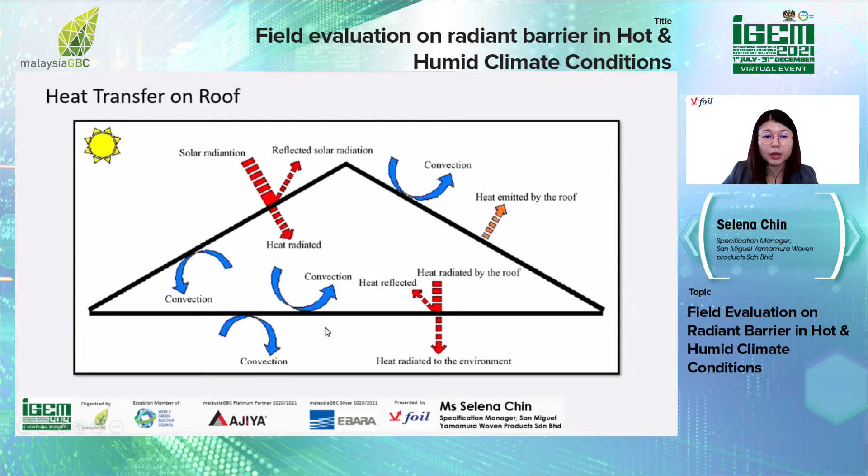The major contributor to heat gain is actually the sun. The sun will heat up the roof, then transfer the heat into the building through conduction, convection, and radiation.

According to research done by Nahar in 2003, 50% of the thermal building loads in hot climates come through the roof. And according to research done by Richards in 1977, the proportion of heat transfer flowing down from the roof through the ceiling is 87% from radiation, 13% from conduction and convection combined, whereas heat transfer through walls is 70% from radiation, 25% from convection, and 5% from conduction.

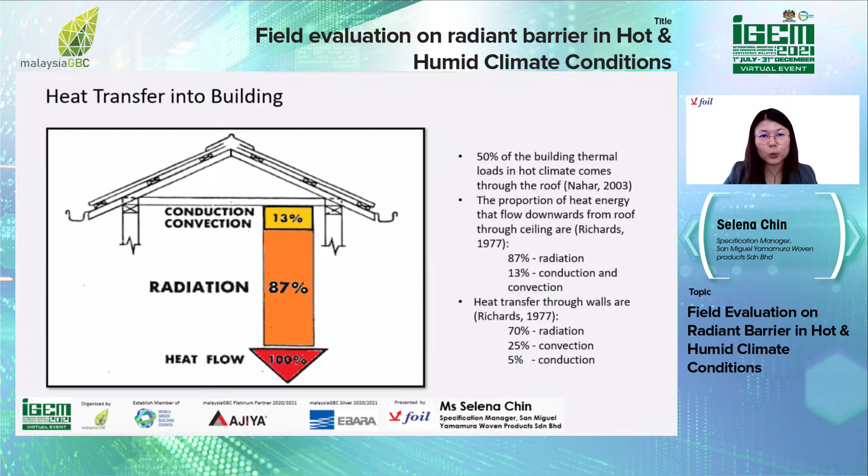Now we understand that 50% of the thermal load is actually coming from the roof. Is it really helpful when we insulate the roof with radiant barrier?

Let's find out. These are the types of thermal insulation technology used for building energy efficiency. It is divided into 4 types of technology: bulk technology, reflective technology, nanotechnology, and vacuum technology.

Bulk technology includes fiberglass, mineral wool, expanded polystyrene, and extruded polystyrene. Radiant barrier, reflective insulation, interior radiation control coating, and gas fill panels are examples of reflective technology. For nanotechnology, one example is aerogel, and vacuum technology includes vacuum insulation panels. Today, we will focus only on radiant barrier and reflective insulation.

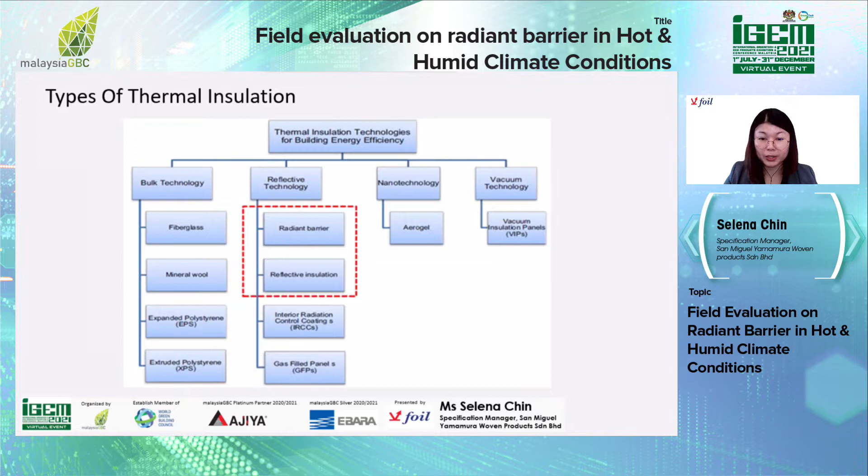What is radiant barrier? Radiant barrier consists of a highly reflective material, usually aluminum foil, laminated to a substrate. The substrate can be woven fabric, bubble fabric, paper fabric, film, or etc. Aluminum foil can reflect 95% of the heat.

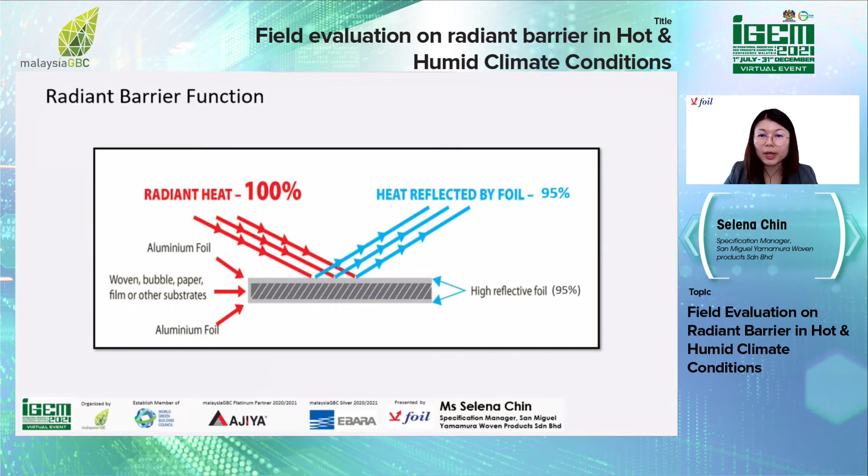How do you express the thermal performance? The thermal performance is expressed in thermal resistance in SI unit. SI unit is an international system of unit and is denoted as RSI.

What are the factors that affect this RSI? First is the emissivity of all surfaces facing the enclosed airspace. Second is the airspace dimension in the direction of heat flow. Third is the heat flow direction, whether it's up or down. And fourth is temperature difference across the airspace, or we call it boundary temperatures.

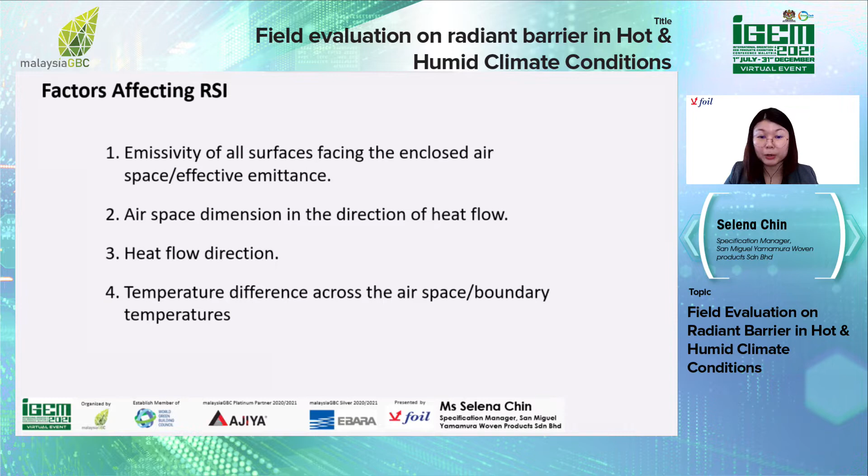There are 3 types of testing methods to measure the thermal resistance of radiant barrier and reflective insulation in the assembly: laboratory testing, calculation method, and field tests. Let's explore each testing together.

Heat flow meter is one of the examples of lab tests. It's tested according to ISO 8301 or ASTM C518.

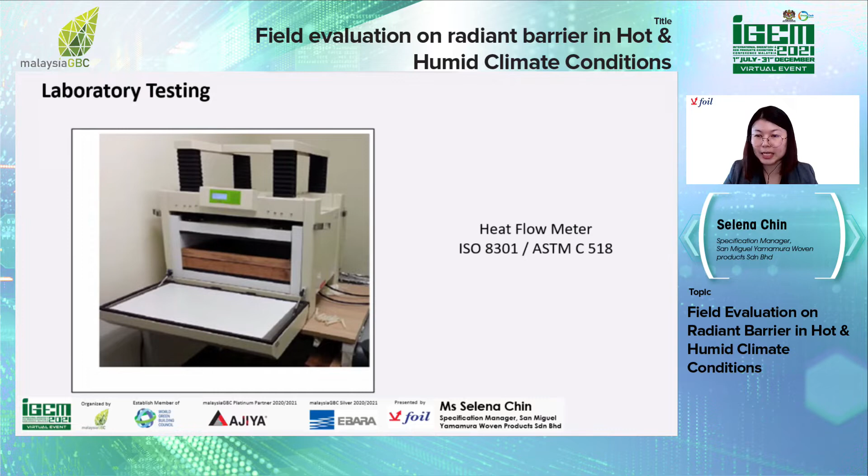What are the advantages of using this heat flow meter? First, it measures the steady state of one-dimensional heat flow through the sample. It can calculate the sample's thermal conductivity and resistivity.

This method is very sensitive. You can measure the thermal resistance of 0.1 meter square Kelvin per watt, and measure heat flow up or down with different angles. It's very easy to operate and can obtain the total RSI of the assembly.

The disadvantages are: specimen size is limited by the equipment chamber dimension, it's very sensitive to heat loss through the sample edges, and it must be calibrated using a known thermal resistance material.

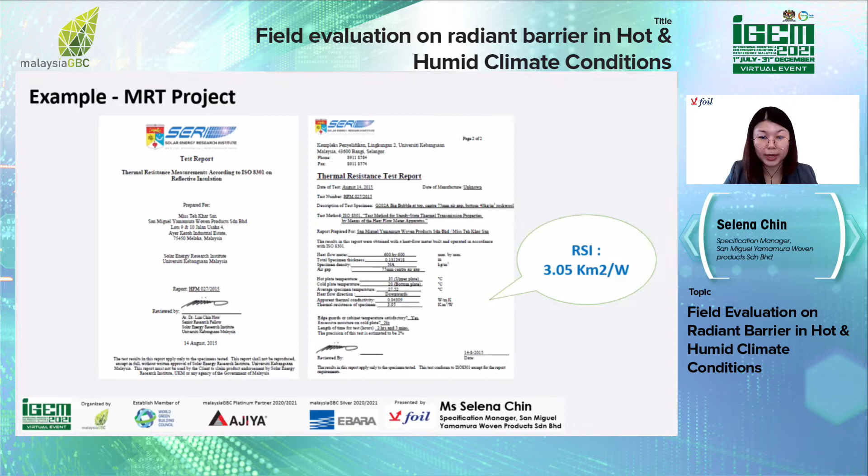Another example of lab test is guarded hot plate. It's tested according to ISO 8302 or ASTM C177.

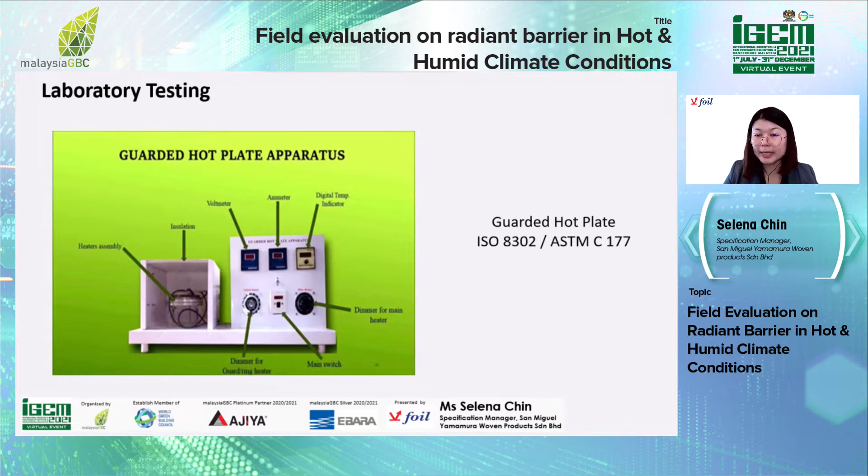The good points of using guarded hot plate are: it measures steady state heat transfer through flat surfaces only, it's an absolute method because you need to measure the specimen dimensions, temperature, and electrical power on it, and it can operate over a wide range of temperatures.

The negative points are: it's just for flat specimens only, with limited specimen size. There must be good contact between the specimen and the hot plate because some samples may have uneven surfaces. Temperature imbalance between the hot plate and the guarded housing must be controlled.

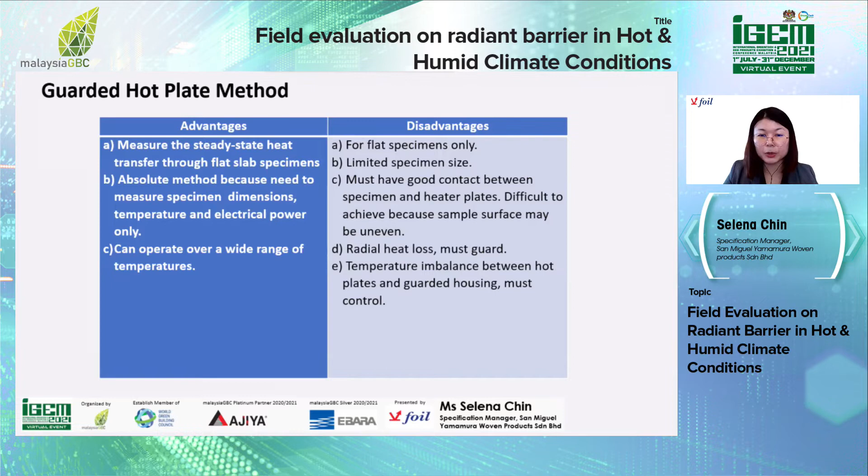The last example of lab test is guarded or calibrated hot box. It's tested according to ISO 8990 or ASTM C1363.

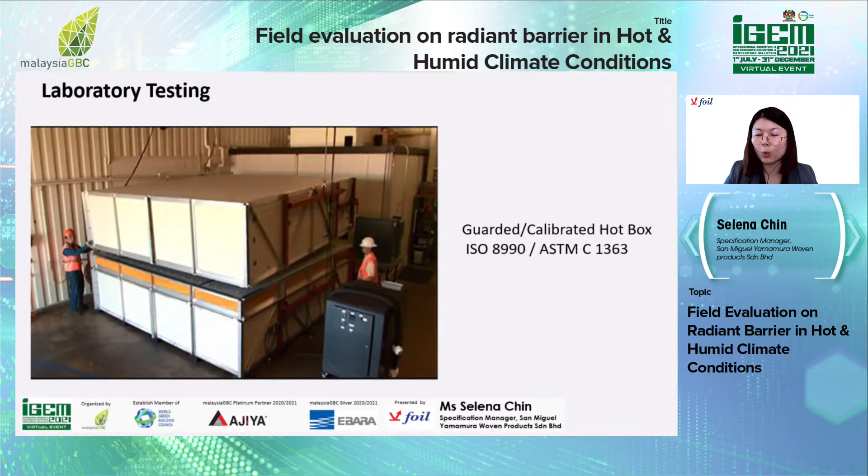The advantages of using guarded hot box are: it measures steady state heat transfer through a specimen, it is suitable for homogeneous and non-homogeneous samples, and it can be rotated to simulate the actual specimen orientation in the field.

The specimen size is definitely bigger compared to the previous two methods, and more thermocouples are used for better temperature measurement accuracy. It can also evaluate the U value for building assemblies.

The disadvantages for this method are: the result may be affected by air movement in the metering chamber, it takes longer time to reach steady state, the box must be sealed to prevent air infiltration, and it lacks precision because heat loss corrections are needed.

Second testing method is calculation method. It is according to ISO 6946, Australian and New Zealand Standard 4859.1, and ASTM STP 1116 standard.

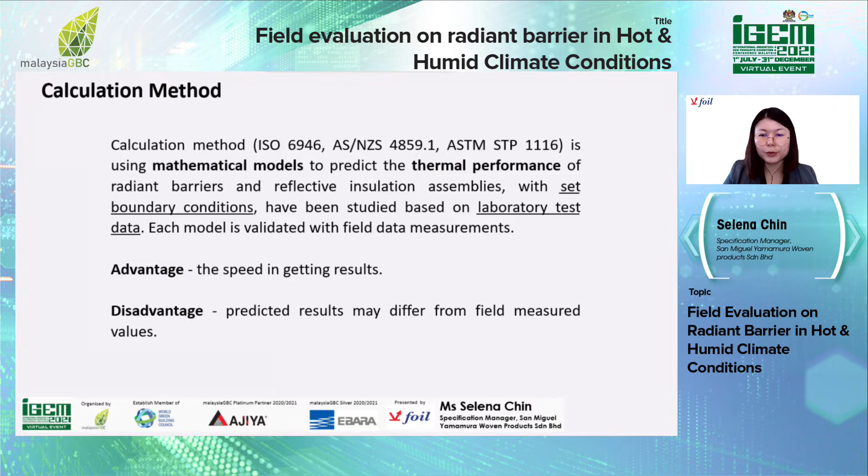It is a mathematical model to predict the thermal performance of radiant barrier and reflective insulation assemblies. You can get the result very fast, but the result may be different from field measurement evaluations.

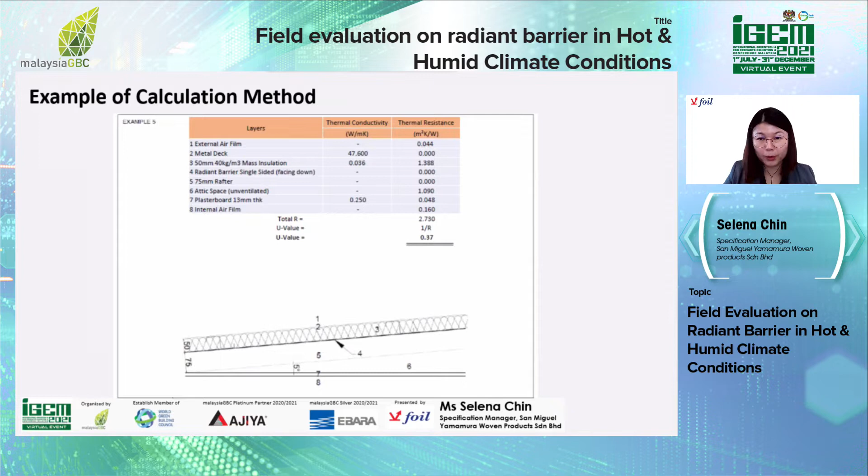This is an example of using the calculation method. You just plug in the numbers into the software, then you can get the total R value.

Field test is the method that is more complex, more time consuming, and requires more resources because the buildings are studied under actual weather conditions. It provides data that most accurately represents the conditions to which buildings are exposed, but there are many complications since under actual weather conditions, the climate variables are uncontrollable. Today, we'll focus on field tests.

These are the problems that triggered us to conduct this field test. There is a lack of field study on the performance of radiant barriers in hot and humid climates, and not much scientific data on the influence of commonly used roofing materials, like tile roof or metal roof, on the performance of radiant barriers. There are ongoing debates on the performance of radiant barrier, for example, people are debating on the efficacies of radiant barrier.

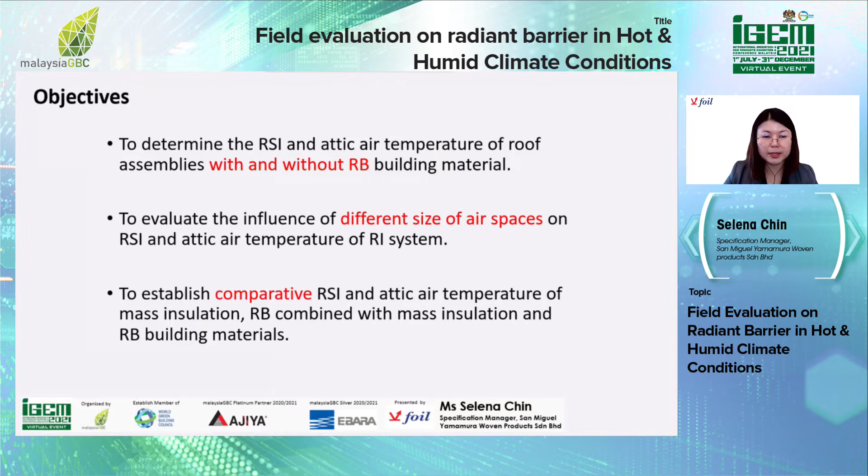The objective of the field test is to determine the RSI and attic temperature of roof assembly with and without radiant barrier building material, to evaluate the influence of different dimensions of airspace on RSI and attic temperature of reflective insulation system, and to compare the RSI and attic temperature of mass insulation, radiant barrier with mass insulation, and radiant barrier building material.

3 test cells were built in our factory located in Ayer Keroh, Malacca. Each test cell was equipped with 1 door. Dimension is 2.2 meter width with 2.5 meter length, and the height is 3.3 meter. The distance between these test cells is 1.9 meter. All of the test cells are facing west.

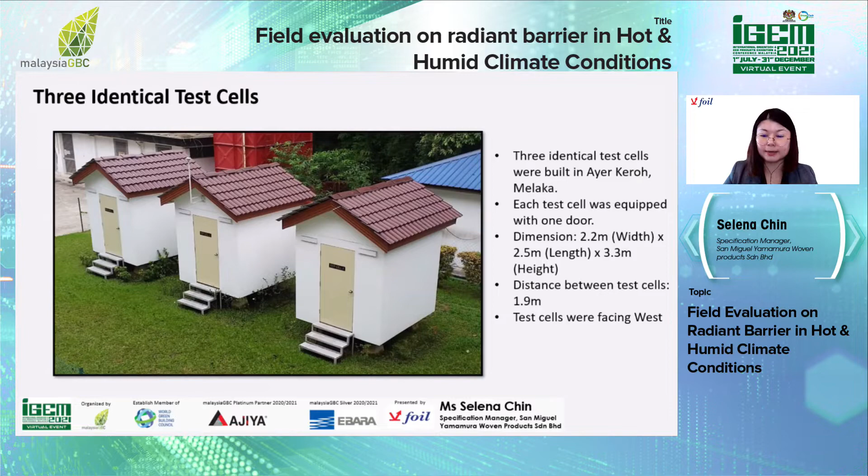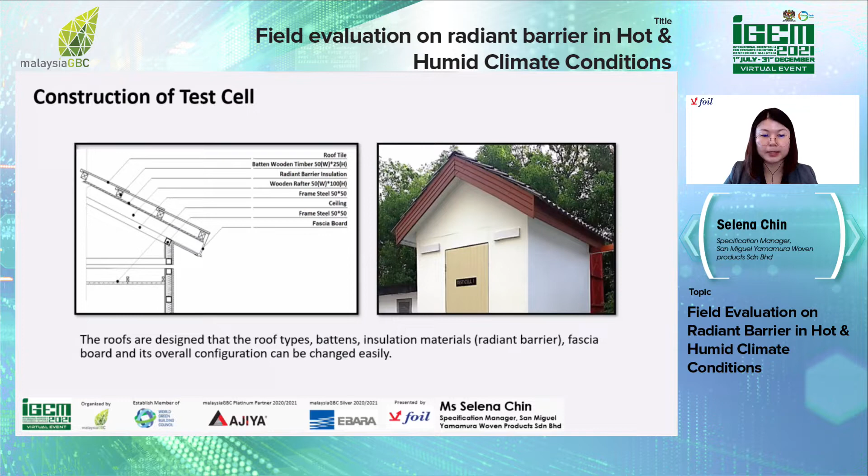The roofs are designed in such a way that the overall configurations can be changed easily because we will test the performance of different types of tile roof, different types of radiant barrier, and different dimensions of airspace. The wall and the floor are insulated with 100 mm thick wool with 80 kg per meter cube, to minimize heat gain and heat loss because we just want to measure the heat from top to bottom.

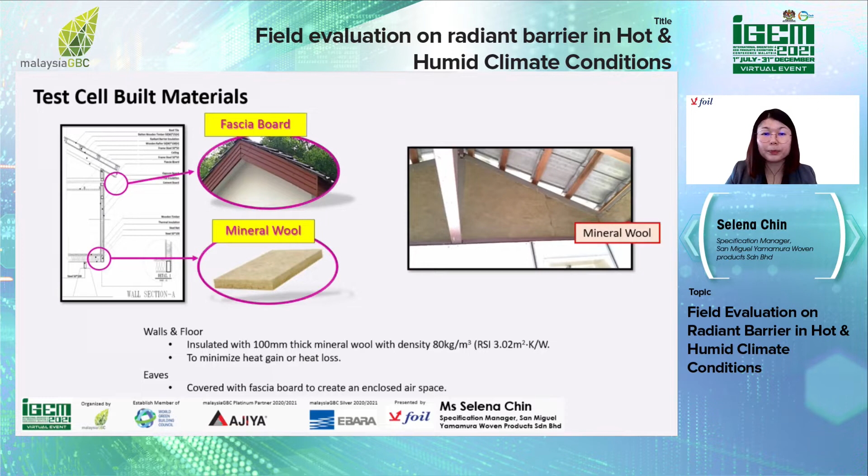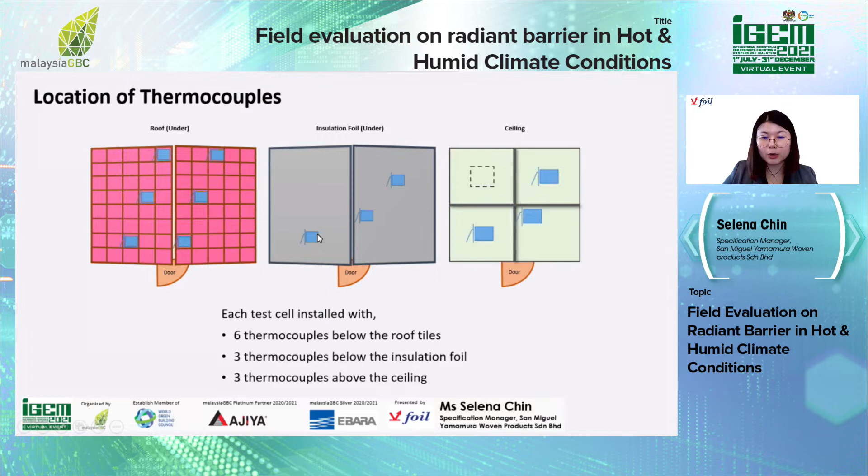This is where the thermocouples are located. We have 6 thermocouples below the roof tiles, 3 below the insulation foil, and 3 on top of the ceiling. This is the sectional view of thermocouple locations. Every thermocouple was installed using aluminium foil adhesive tape.

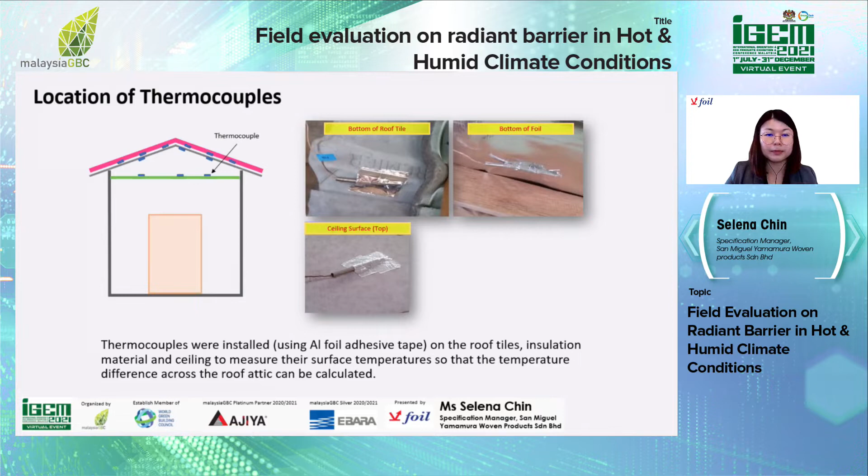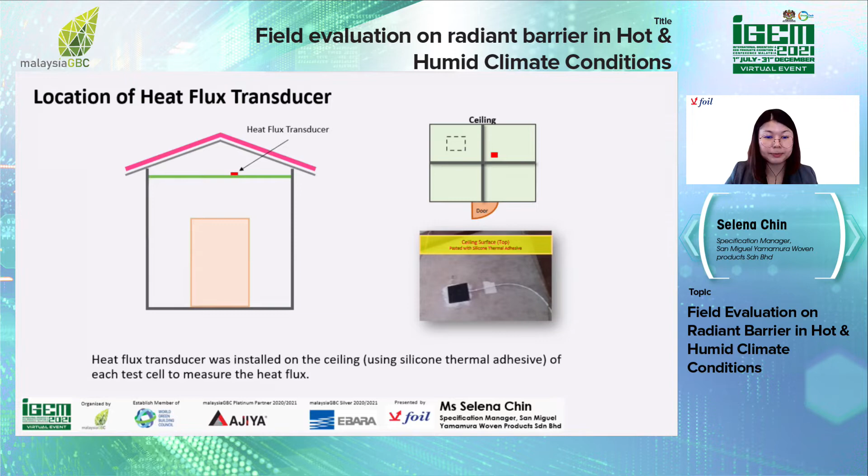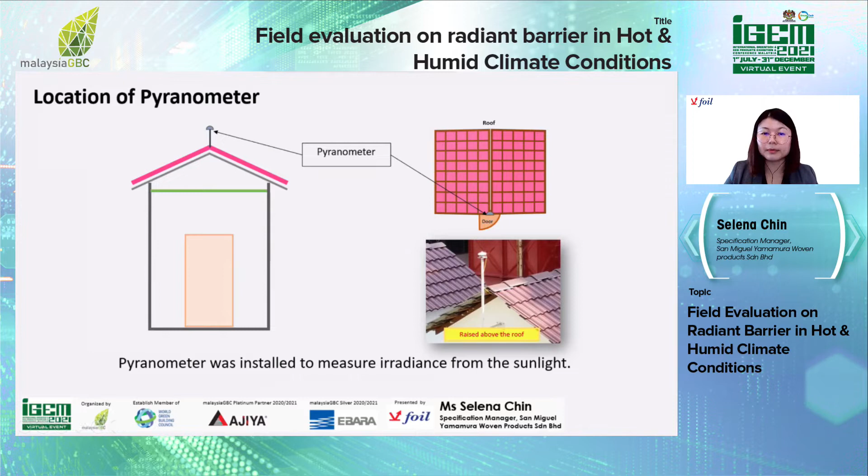This is the location of the heat flux transducer. It is installed on the ceiling with silicone thermal adhesive to measure the heat flux across the attic. The pyranometer was raised above the roof, installed to measure the irradiance from the sun. The data logger was installed in the attic to measure the attic ambient temperature.

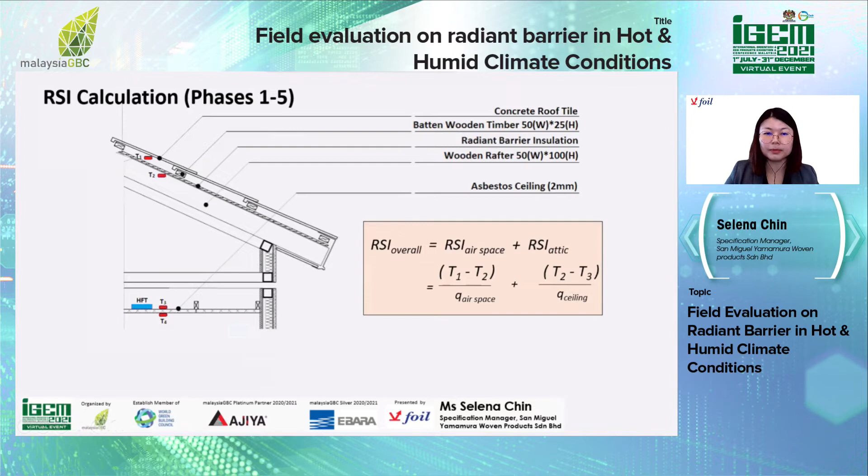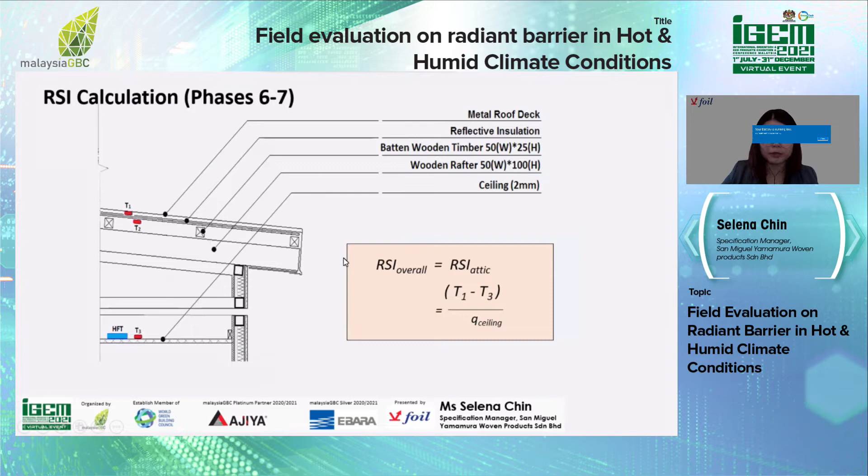This is the calculation for overall RSI. For phase number 1 to phase number 5, the overall RSI is the RSI of the attic plus the RSI of the airspace. This is the detailed dimensions of the airspace. The attic dimension remains unchanged, but we will change the airspace dimension according to the project tested. The overall RSI for phase number 6 and 7, which use a metal roof, is the total RSI of the attic because there is no airspace on top of the building. This is the dimensions for the metal roof.

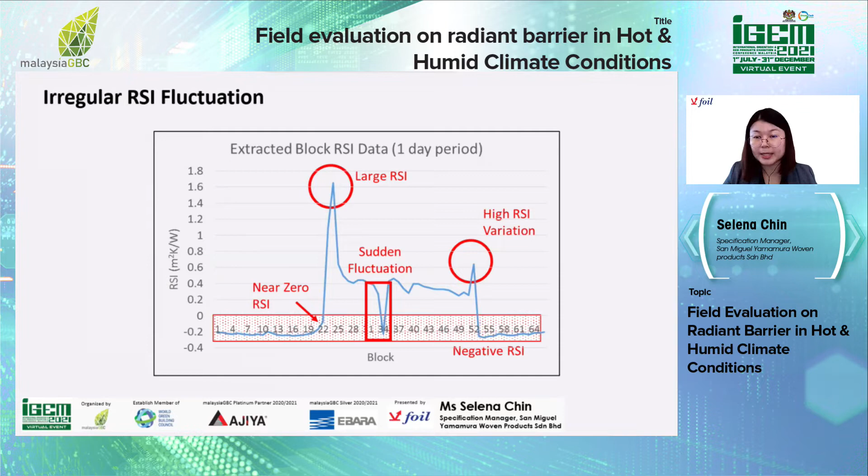Along the study, along the evaluations, we faced a lot of challenges, for example irregular RSI fluctuations. We get nearly 0 RSI, large RSI, sudden fluctuations in RSI, high RSI variations, or negative RSI. After a thorough study, we found out the possible causes for these irregular RSI fluctuations. Negative RSI can be caused by heat flow upward rather than downward. Large RSI can be due to the changing point between heat flow directions. Nearly 0 RSI is caused by small temperature difference, and sudden fluctuations are affected by cloud shadowing and raining. High variations can be caused by wind and cloud shadowing as well.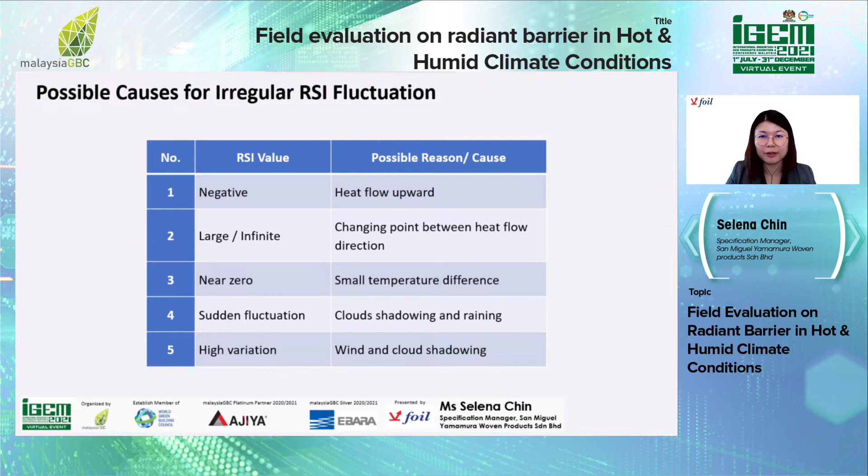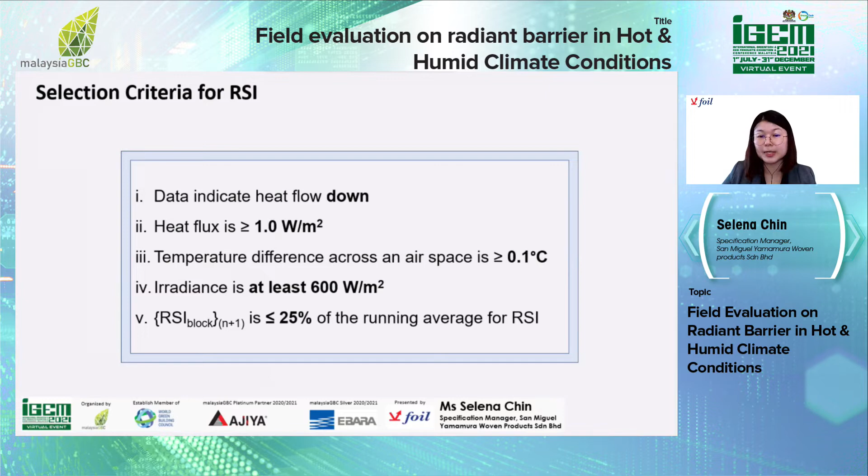Due to all these challenges and irregular RSI fluctuations, we have fixed some selection criteria for RSI. First, the data must indicate heat flow down. Second, heat flux must be more than or equal to 1 watt per meter square. Temperature difference across an airspace must be more than or equal to 0.1 degrees Celsius. Irradiance at least 600 watt per meter square. The average RSI block fluctuation must be less than or equal to 25% of the running average RSI.

Let's go phase by phase in detail. Phase 1 is tested under concrete tiles with 25 mm airspace. Test cell 1 uses woven foil, double-sided woven foil. Test cell 2 is without any foil. Test cell 3 uses double-sided aluminum foil. Let's see what the results are.

The objective for this phase is to determine the RSI for various types of radiant barrier with 25 mm air gap under one type of roof in hot and humid climates.

This is the result for phase 1 for attic ambient temperature. Maximum outdoor temperature is 43.3 degrees. Test cell 1 with double-sided aluminum foil achieved 37.2 degrees Celsius. Test cell 2 without any radiant barrier achieved 46.1 degrees Celsius. Test cell 3 with double-sided bubble foil achieved 36.7 degrees Celsius. Test cell 2 without any radiant barrier achieved the maximum, 46.1 degrees Celsius.

In terms of RSI comparison, the test cell without any radiant barrier achieved RSI 0.37. Test cell 1 with double-sided aluminium woven foil achieved RSI 2.37. Test cell 3 with double-sided aluminium bubble achieved RSI 2.93, which is the highest among the three.

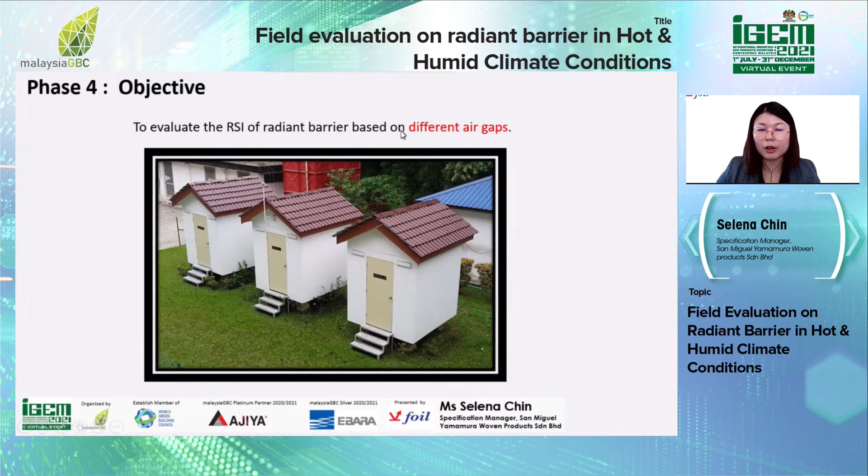Outdoor temperature is 36.9 degrees Celsius. The test cell with 50 mm airspace achieved 36.7 degrees Celsius. The attic with 25 mm airspace achieved 37.8 degrees Celsius. The attic with 75 mm airspace achieved 35.4 degrees Celsius, which has the lowest attic temperature.

In terms of RSI comparison, the RSI for 25 mm airspace is 2.41, and the RSI for 50 mm airspace is 2.41 as well. The RSI for 75 mm airspace again increased tremendously in this area, to 3.09.

Phase number 5: we changed the roof of two of the test cells to clay tiles with 25 mm airspace. Test cell 1 is installed with concrete tiles with double-sided aluminium foil. Test cell 2 is clay tiles without any foil. Test cell 3 is clay tiles with double-sided aluminium foil. The objective of this phase is to study the performance of clay tiles versus concrete tiles.

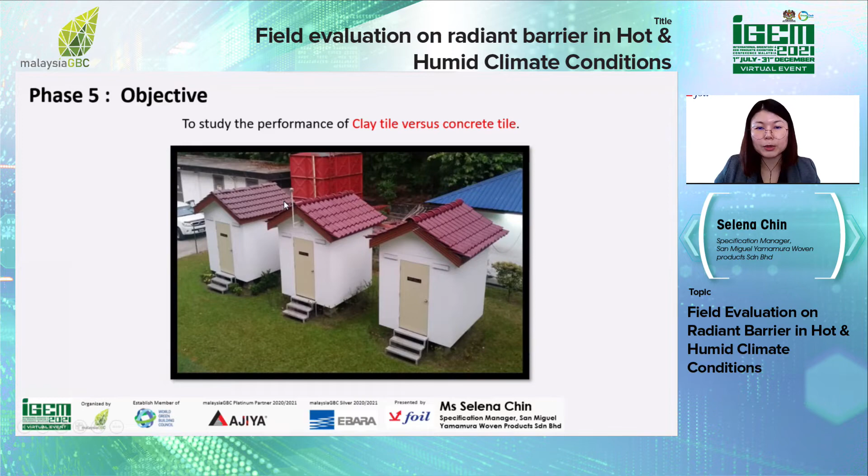You can see from the picture, test cell 1 remains with concrete tiles, while test cells 2 and 3 have had their roofs changed to clay tiles.

Outdoor temperature is 37.2 degrees Celsius. Test cell 1, concrete tiles with double-sided aluminium foil, achieved 36.7 degrees Celsius. Test cell 2, clay tiles without any radiant barrier, achieved the highest temperature at 43.8 degrees Celsius. Test cell 3, clay tiles with double-sided aluminium foil, achieved 36 degrees Celsius.

In terms of RSI comparison, RSI for clay tiles without any foil is 0.4. RSI for clay tiles with double-sided aluminium foil is 2.26, and for concrete tiles with double-sided aluminium foil it is 2.4. From here you can see clay tiles with radiant barrier perform slightly better compared to concrete tiles with radiant barrier.

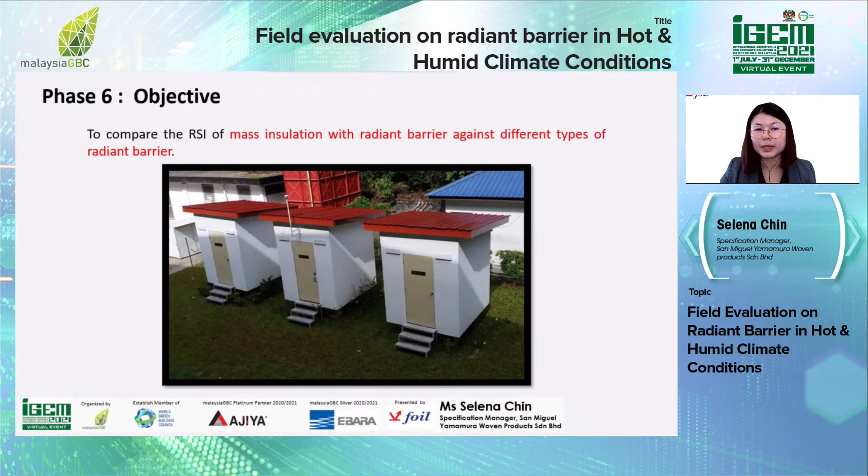Phase number 6, we have changed the roof to metal deck. For test cell 1, we are using mass insulations with woven foil. Test cell 2 uses 8mm double-sided aluminium foam foil, and test cell 3 uses double-sided aluminium bubble foil. The objective of this phase is to compare the RSI of mass insulation with radiant barrier against different types of radiant barrier. You can see we have changed the roof to metal roof.

In terms of RSI comparison, roof with double-sided aluminium bubble has the lowest RSI of 1.77, followed by roof with mass insulations with double-sided aluminium at RSI 2.23, and the highest is 2.37, using double-sided aluminium foam foil.

We have come to the last phase of the project. Using metal deck, for test cell 1, the insulations remain unchanged. For test cell 2, we use mass insulations only, and test cell 3 we are using bubble foil. Let's look at the results.

The objective for this phase is to study the RSI performance of different types of insulation system under metal roof.

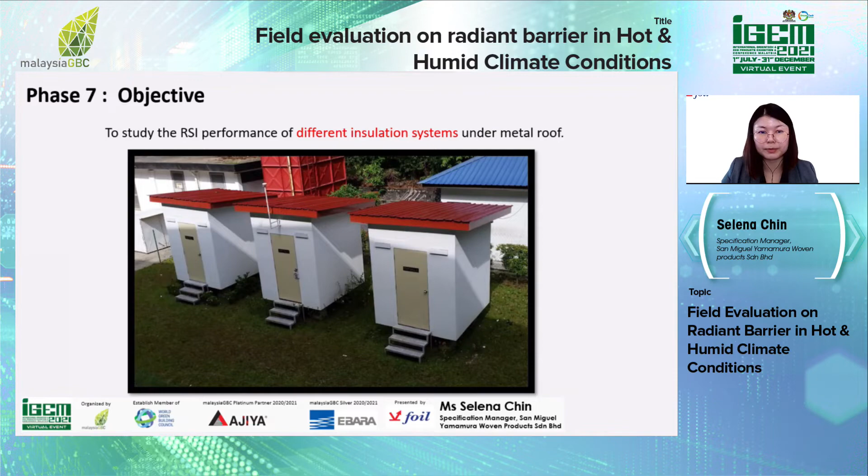This is the attic temperature result. Outdoor temperature is 37.7 degrees Celsius. Metal roof with mass insulations and aluminium foil achieved 37.6 degrees Celsius. Wool alone only is 39.1 degrees Celsius. And mesh with bubble foil itself is 38.1 degrees Celsius.

For RSI comparison, wool itself has the lowest RSI at 1.61, followed by bubble foil at 2.02, and the highest is wool plus radiant barrier at 2.77.

In conclusion, for concrete tiles with configuration of 25mm space, test cell 1 with woven foil has RSI 2.37, without foil is 0.37, and with bubble foil is 2.93. There is an improvement of 24% when you change from woven foil to bubble foil.

Test cell 2, concrete tiles, 50mm space: there is an increment of 25% in the RSI when you change from woven foil to bubble foil. And comparing concrete tiles with clay tiles, there is a 6.2% increase in the RSI when you change from concrete tiles to clay tiles.

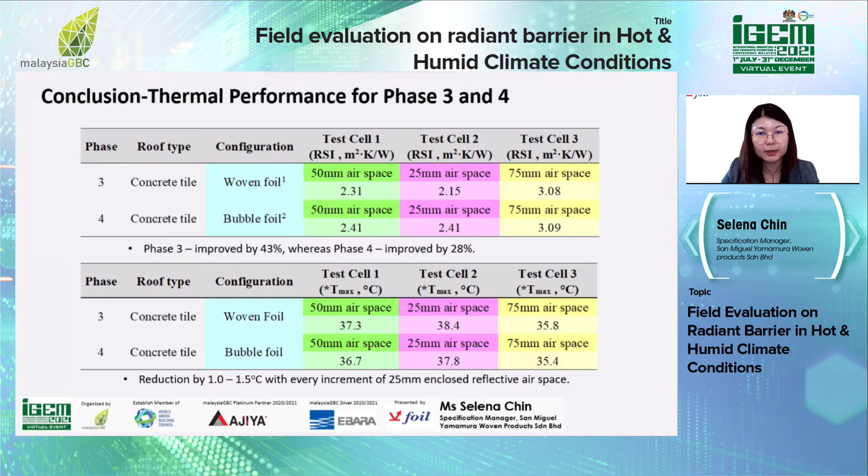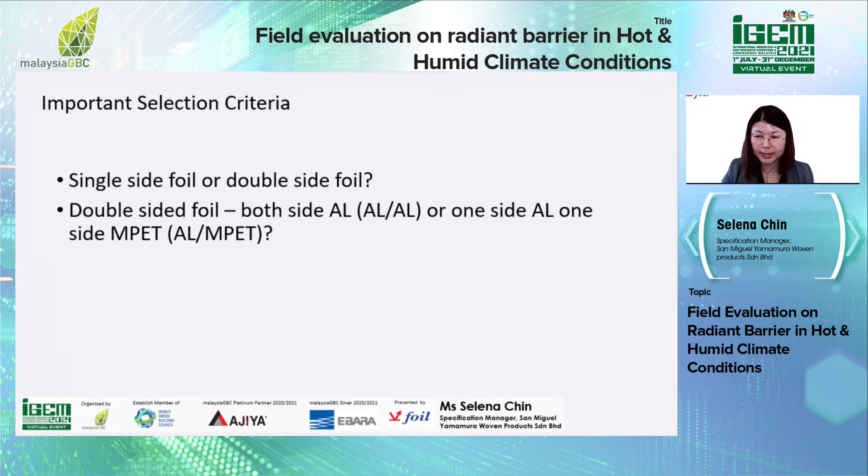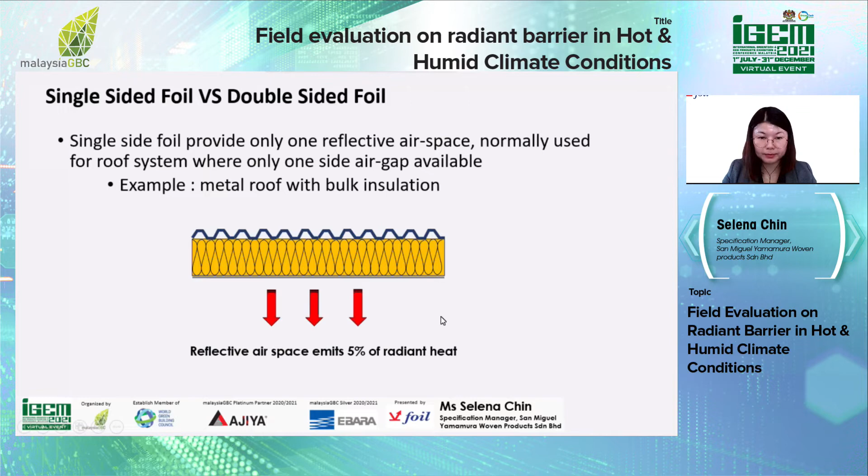Double-sided aluminium foil, with aluminium and metallized sides, functions the same as single-sided aluminium foil, but provides a better vapor barrier. Double-sided aluminium is suitable for tile roof systems. In a tile roof system, there are two types of air gap: one in the attic airspace, and another at the batten area. Using double-sided aluminium foil in a tile roof system can maximize the thermal performance.

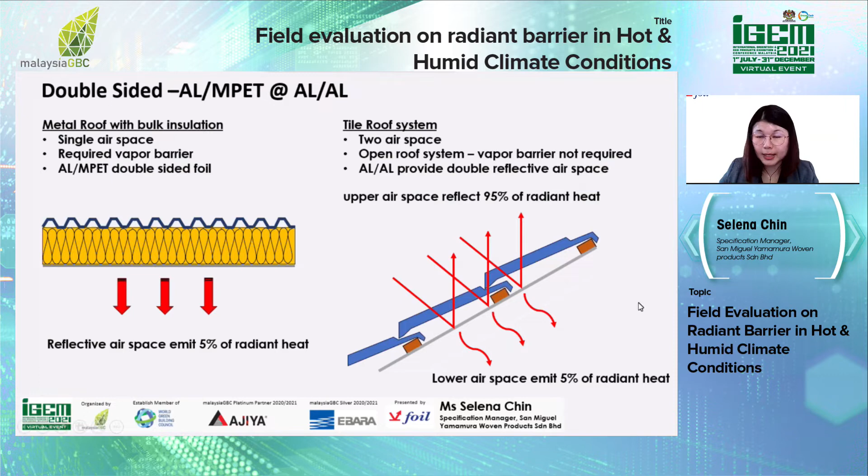Of course, a suitable material always comes together with proper installation. There are important guidelines to follow. First, ensure the high reflective surface is facing the air gap. Ensure no leaking on the roof, otherwise the aluminium will be oxidized. We encourage 3 to 6 inches overlapping at the edges, and avoid installation during raining days.

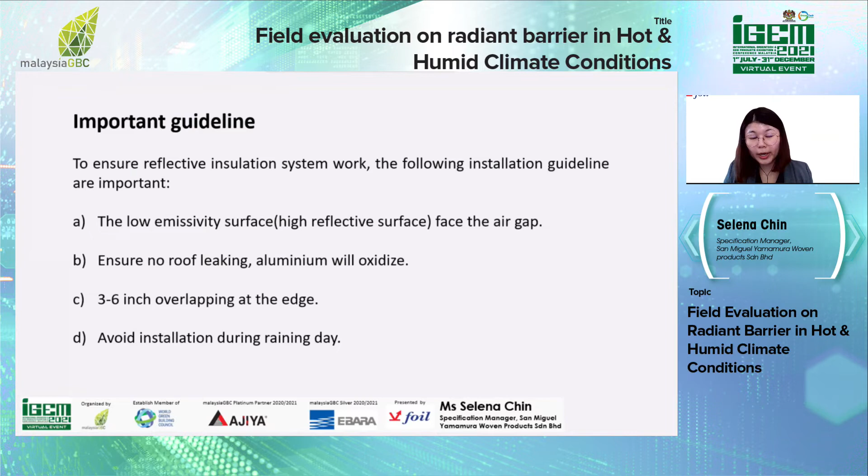This is how the installation looks like when using paper type foil. Paper foil itself is very moisture sensitive and does not provide any strength, so installation for paper foil has to come together with wire netting to support the whole system. If you go for woven type aluminium foil, you can ignore the wire netting because woven itself gives better strength compared to paper.

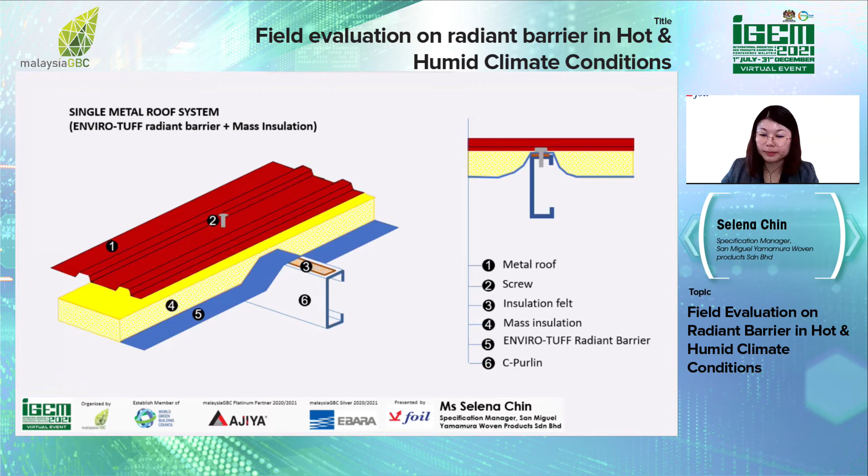This is one of the systems we purposely created to achieve a certain R value. For example, here you can see metal deck with mass insulation, then radiant barrier and reflective airspace. We purposely created this reflective airspace so that the overall R value will be increased.

This is the installation for bubble foil and foam foil. Due to the product texture, because the product carries weight, during installation it will sag a little bit. So we'll see a sagging here. This sagging actually creates an enclosed airspace, which is good for RSI.

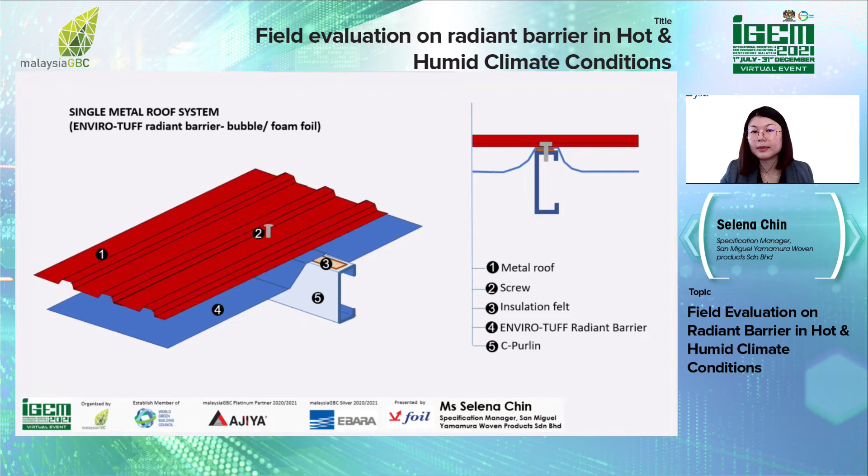This is another system created to achieve a certain RSI. You can see here there are 2 reflective airspaces. Definitely the RSI will increase tremendously.

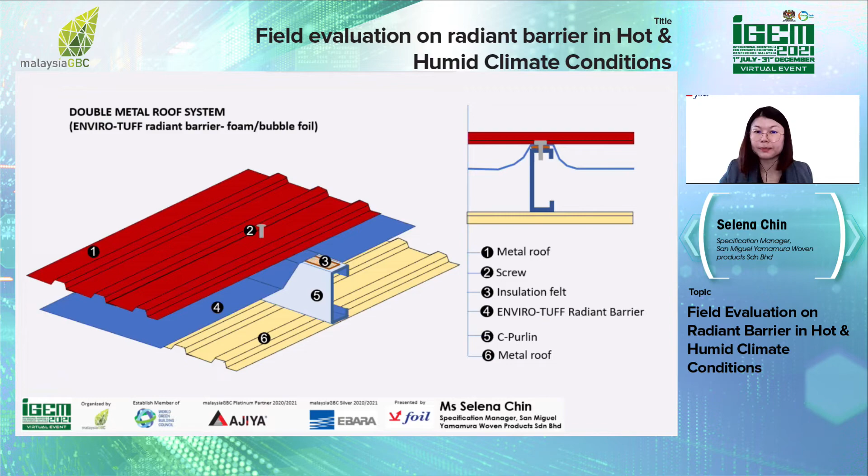That's all from my sharing. I hope it's beneficial to you. I will pass it back to Eugene.

Thank you, Selena. Thank you.

Yeah, very informative, a lot of numbers here for the sharing this morning. We are living in tropical weather, and knowing how a design like this can actually reduce the temperature and reduce the cooling load is very important.

All right, ladies and gentlemen, now we have come to the question and answer session. We will take the questions received from the floor. Any questions? Yes, I'm seeing questions coming in. All right, question one: can you elaborate further on the location of this airspace, for the benefit of many, on where exactly the airspace is measured at the roof? Selena?

The question is about the location of the airspace. The location of the airspace is actually the batten height airspace. Just now we showed we tested on a 25 mm batten height - there's the batten height here. So the foil is below the batten and the tiles are on top of the batten, so there's an airspace here. When we change from 25 mm to 50 mm, considered as a counter batten, then we increase the airspace here to 75 mm airspace.

And this particularly refers to the concrete tiles, right? Yes, concrete tiles or clay tiles.

Okay, let me move to the second question. Any test has been conducted to compare steel decking, referring to metal roof, with polystyrene foam, below the concrete roof tiles and clay roof tiles?

Unfortunately, no. I think it's referring to PU foam, is it? Maybe the polystyrene foam. If the audience is interested to conduct this test, maybe you can send the inquiry to us. We will look at it, whether we have the opportunity to work together to conduct this research. That's a good idea, Selena.

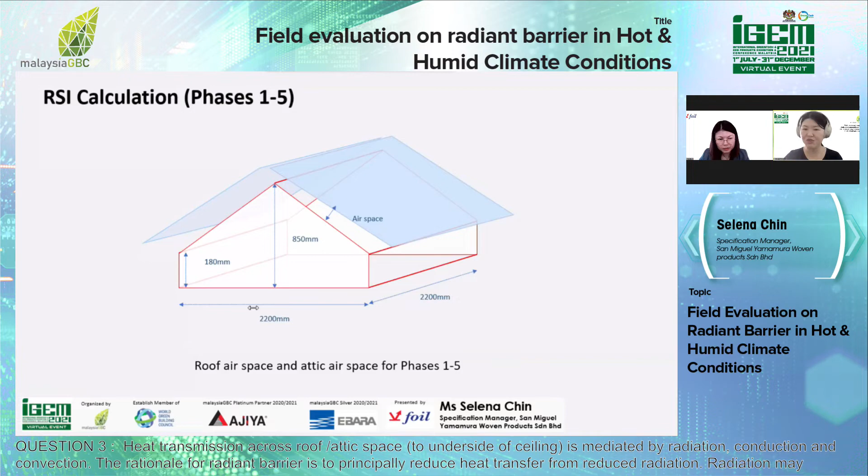Your study is not rigorous enough, in my opinion. No attempt at a theoretical analysis of effects of conduction and convection across the roof space. A study which only considers radiation without looking at the other two factors may be really subjective. What do you think about this statement, Selena?

I think it's because this is only addressing the radiation. What about the other two factors? Yeah, I agree with you. For our field evaluations, the main heat actually is coming from transfer through radiation. So for these evaluations, we tested on radiation heat only, and we have not taken into consideration the conduction and convection. But I do agree a ventilated attic actually performs better, having a higher R value compared to a non-ventilated attic.

Mm-hmm, okay, because of the air movement, right? Yeah. Okay, now we go to question 4.

Okay, now we have a shorter question. How to overcome the heat transfer at the purlin area? You mean by thermal bridging, right?

Actually, in the market, there is one type of thermal stop. So you can purchase a thermal stop to install at the purlin area. Thermal stop, okay. So they may also email you or contact you to clarify on this statement, right? Yeah, or to get information on this. All right, thank you.

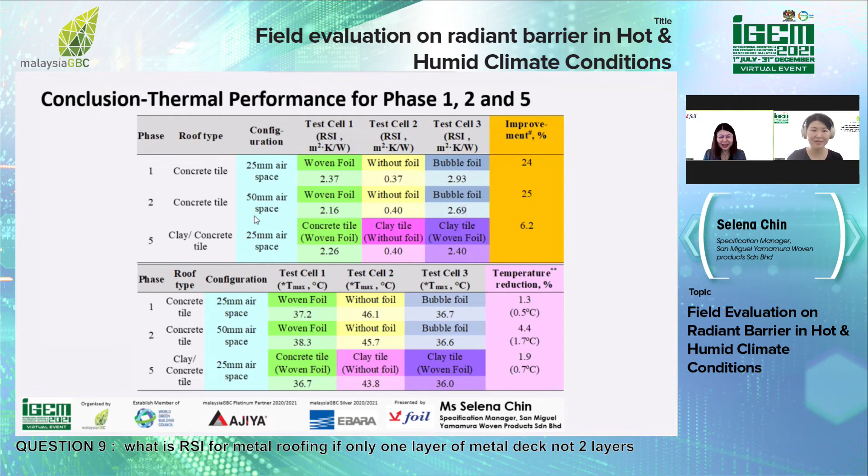What is the RSI for metal roofing if only one layer of metal deck and not two layers? You mean the RSI for the material itself or the RSI for the whole system? If for the material itself, RSI for metal roof, based on calculation method, usually it's 0. But you have to clarify this with the metal roof manufacturer.

Okay, then if for the roofing system, then you will add the metal roof R value together with mass insulation R value. For example, rock wool 50mm or 50mm 40kg has 1.39 of the R value, plus another layer of foil. So that will be the system R value, depending on which one you're looking at, referring to.

Okay, so perhaps you can also contact Selena if you'd like to have a specific calculation method. Yeah, yes.

So I think this was a very technical presentation from Selena this morning - a lot of numbers. I hope it benefits the audience. Sure, especially living in this tropical hot weather. This knowledge is very beneficial. Thank you. Yes, all right.

Okay, so I think that is - oh, this is the last, these are the last questions, right? Yeah. So I'm thinking that all the questions have been answered. Any more questions coming in?